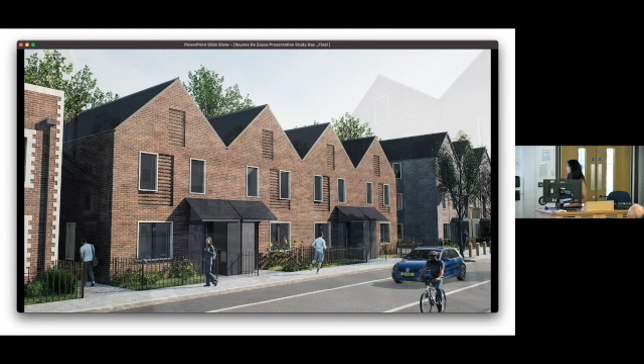Just talking about the passive house standard. I'll throw hands up, I'm not an expert, I just know that we don't have a leaky house now in our prototype. One of the things I've realised on the journey is it's hard, it's not easy, and we've had lots of interesting tape analogies trying to tape up a house like a Tudor home to get this air tightness, which is 0.2, which we've achieved on our prototype. I'll show you in a minute.

The point here is that we're trying to fail quick and learn quick around everything we're doing, understanding: okay, so what is the best tape? What is the best solution to push forward the economies of scale we need to build houses for social housing?

Importantly, it's making sure we're building to a standard we feel very strongly about. Not every client right now will be ready to do this, but we want to feel we're bringing them on the journey and educating people around what that means to them, how we make it a reality, and how we look at the third, fourth, other tertiary things affecting that.

So just a bit here about the roadmap to net zero. We've gone down the passive house route. We feel that offsetting is not an option for Dixon and Collida, but there are various routes you can go. We feel this is the one most integral for Collida.

And there's also the future standard of 2025, 2030 - it's mandated to be net zero ready, so start now rather than waiting until that moment of being reactive. Appreciate everyone's on the journey to do that, but it's about defining the justification for doing it now, and the whole life cost part of it, which we should be working on.

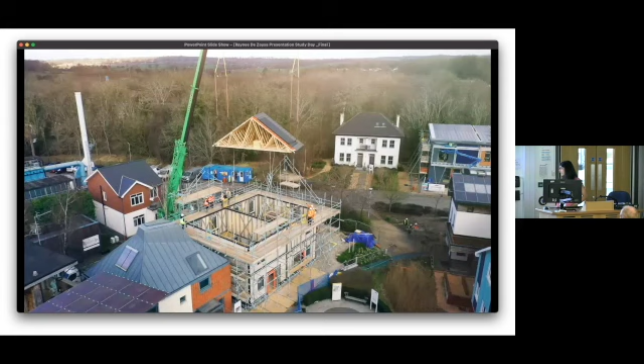Then we've got down to Cat 5, which is our service module. We decided we wanted to listen to our customer, did a bit of a survey, and created a home zero unit that sits just outside of the house with everything in it - the cylinder, the MVHR unit. The reason is that a lot of the time it's hard to get into end user homes for maintenance of these assets, so we decided to put it on the outside, allowing maintenance people to go in without intruding on the customers. A very simple design idea, but when we listened to customers, it helps a lot when it comes to maintaining it.

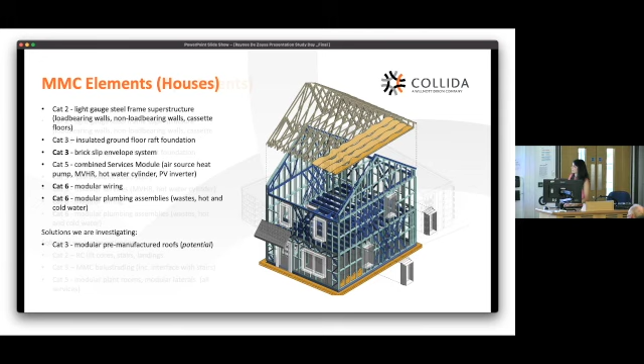With modular wiring, we wanted a plug and play feel where anyone, without a particular skill set, can come in and do it - that USB feel around our modular wiring. Then we had a manufactured prefabricated roof - it came in a day, arrived in one lorry in two parts, and was popped on site. Similar to our apartments, the only difference is we've got bathroom pods, and we've got a site at the moment which we're working on in London.

So, the prototype homes at the BRE Innovation Park. We started this journey about a year ago, and we're almost near completion, which will be in September, so I welcome anyone that wants to have a look - please feel free to contact me. The idea of the home was to educate all of us and allow us to have that real frank conversation around how on earth do we make this work in reality, and have data around what the whole life cost is.

What is it going to be if I put five on my site? And have quick feasibilities around what practically we need to do for a customer, or for anyone trying to get into the market - what do we need to do incrementally to get to having a net zero home?

This is an image of our roof that went in a day. As you can see, we put scaffolding in on this project - the reason is we did one side with it and one side without, because we wanted to do lots of checks as we went through the process. But when we do it for real, it will not have any scaffolding. We do it this way so we can get lots of data and video footage. It was a real moment.

One thing we did learn on this was about the wind. We couldn't do it on the particular day we scheduled, but it did dictate when we did it - something to think about when assembling this.

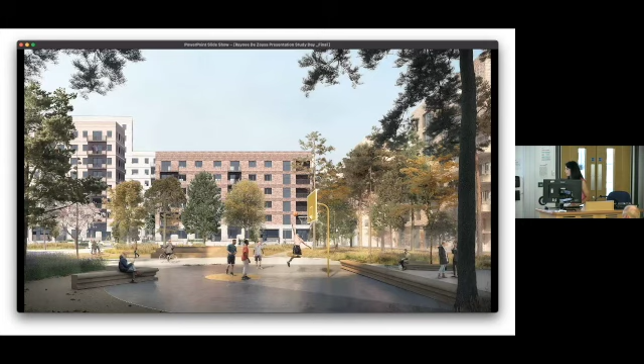This is Gascoigne Estate, so we've done an 8-block apartment which is going to be a Passive House Plus. I think it's part of a wider estate built in East London. There'll be bathroom pods in it, and we're going on to site in about a couple of months' time, so it's gone through all its RIBA stages.

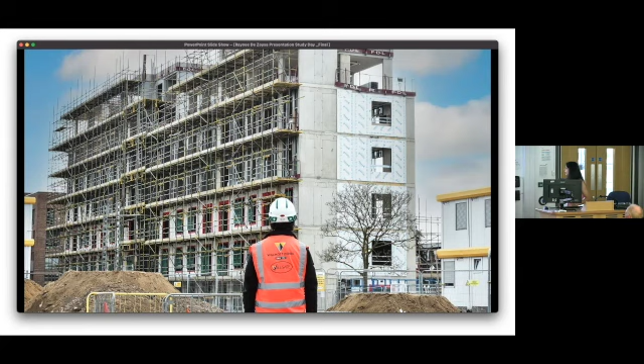Innovation - so just a summary on the living then. Going back to the low carbon MMC solution, it's really a case of sharing what we've done so far, and how it's helped us inform how we want our customers to feel more confident around a Passive House solution, and feel that it's not niche.

We can make it at scale, and we've got the supply chain to fully back us, and we're working with them to get the standards right. So then we come on to learning.

Learning for us concentrated on the DFE procurement route and the DFE Spec 21. We came up with a kit of parts approach for learning, making sure we have a standard secondary school offer that does everything it needs to do for Spec 21. Collida's got a lead architect who has essentially worked on all these components around the classrooms, so that they are very much configurable when we go for tendering for a project.

We've done it in a visual as well, and I will send a link to our visualizer where we've actually visualized everything in 3D. But it's not just about the visualization, it's about the backing of the supply chain.

One of the things we've done is inherently made sure that we have all our supply chain backed up behind it, and it's been a hard slog - it's not easy - but we are working very closely with key partners to get that right. So the kit of parts approach for secondary schools - net zero building is just exactly what it is, there's no negotiating on it, and it's part of the new DFE construction framework, which we're on at the moment, which is a higher value band.

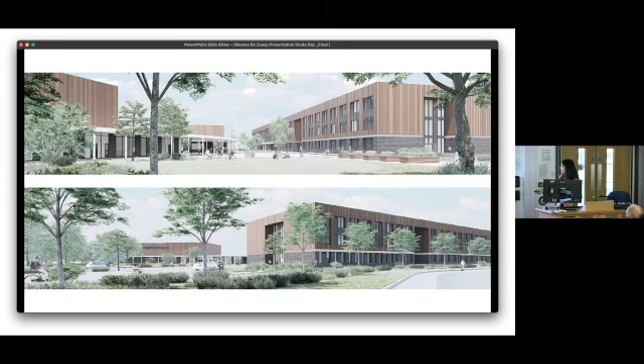Just a couple of CGIs on our school and the versions that we're on. This is probably a little bit more bespoke than you would get, but then you've got this area here which is a standard block. So what we've tried to do is have a flex solution around having standard blocks, but also the flexibility of having additional stuff to it.

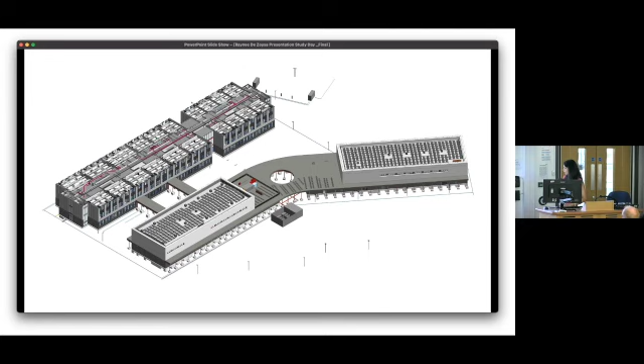It's about being able to cost it right and have confidence around what it's going to cost at the end of it, not the old kind of manufacturer or main contracting scenario of 'oh, it's going to cost you more later.' It's really about trying to flip it on its head and look more like an assembly line - assembling the Lego blocks and measuring all of those at a micro scale to then build up.

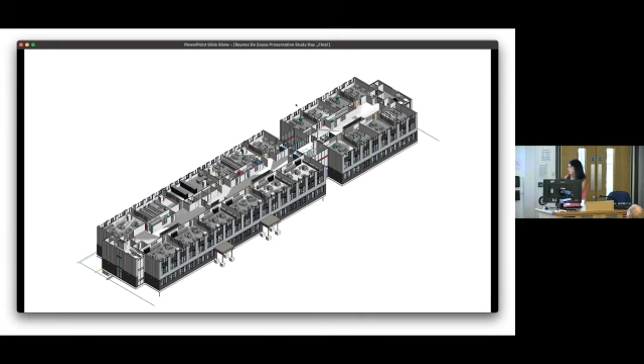Again, just a couple of images of some of the standard classrooms.

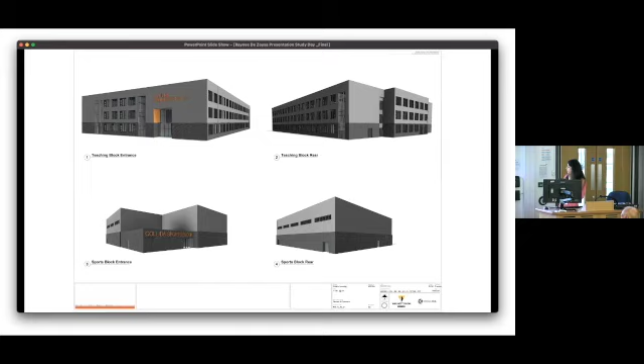Visualise there as well. So I'm just going to finish off - I don't know, I've probably raced ahead a bit more time.

I kind of wanted to give you the delivery aspect of it. There's probably a lot of technical stuff I can probably answer a little bit, but I've got my team that do a lot of that. I just wanted to give an overview of the delivery and the tangible parts of what makes that product and house or living product, and the kind of MMC element that goes through that.

And then the net zero thinking - what we at Collida are trying to do is, okay great, have one of our schools or one of our houses, but it's about the education piece and actually having time to go have a look, interrogate, question, come back with feedback, and realise it's part of what we were talking about with quality user choice. Well, we don't want quality user choice, we want it to be the standard it is, and we set a passive house standard, but sharing that knowledge.

So for us it's fail fast, learn quick, and hopefully we'll get there together for net zero with integrity. Thank you.